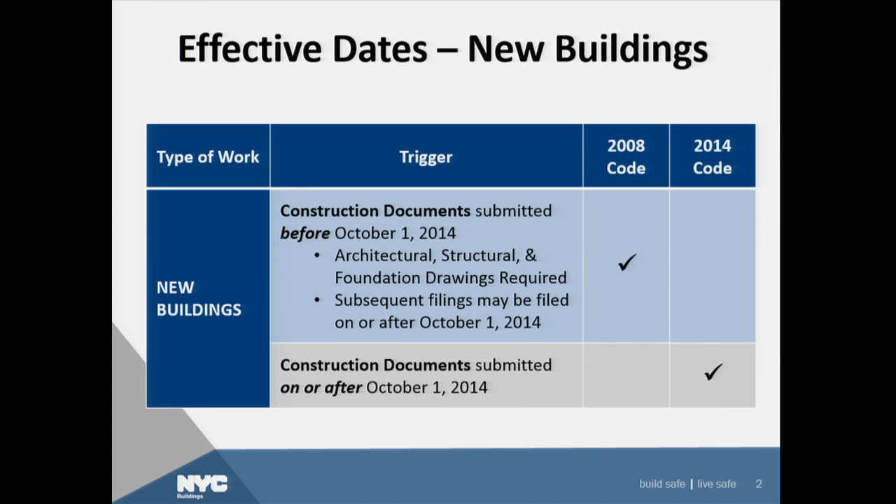So that makes sense, but what happens if I submit my architectural, my structural, and my foundation drawings before October 1, and then I file my fire alarm application 8 months later? That fire alarm application will be reviewed under the 2008 codes as long as your architectural, structural, and foundation drawings were submitted prior to October 1. And that's how it works. It's similar to how we did it last year. There is no period where you can choose either one. It's an on or an off. October 1 is the date. Before October 1, after October 1.

Alterations are a little bit simpler. For alterations, it's just before October 1, on or after October 1. And it's a submission of construction documents to the Department of Buildings, receiving that AP entire status in the computer, and that's what determines which code you will use for your alteration. And when I say which code you will use, that does not mean that after October 1 you must use the 14 codes for all your alteration work. No. It means that you apply the alteration provisions of the 2014 construction codes.

So what does that mean? Well, the 2008 code tells you how to do alterations, and the 2014 code likewise will tell you how to do alterations. It doesn't mean you must always use the 2014 codes for your alteration, but there are certain times you might need to, for fire suppression, accessibility, maybe some other things. But the alteration provisions, as I'm going to go into in my third segment, have some very important differences. So that date of October 1 may be very important for your alteration, because how we treat alterations is changing in some fundamental ways on October 1. And it all depends on when you submit your construction documents to us. And that buildings bulletin will explain it in more detail.

So let's talk about Chapter 33. Chapter 33 is the chapter of the building code that tells you the safeguards during construction operations, how we keep our sites safe, how to underpin properly, how to keep your fences and netting and all that stuff, how to keep debris. It also has some important provisions that tell you who might be qualified to perform certain types of work, or to get on certain types of rigs, or to lift certain things. Those are changing on October 1. So this might be very important for you if you are on a large project where you have to determine those types of things. So again, it's October 1, but there are some nuances, and I'll walk you through some of those nuances.

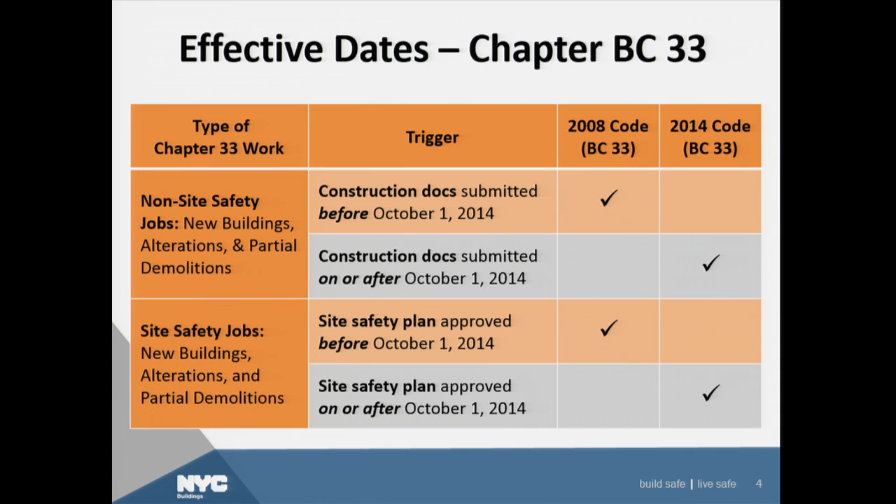But if you're not a site safety job, don't worry about it. This Chapter 33 follows the same code that your underlying work follows.

And of course, full demolitions are a little bit different, not on purpose, but after we looked at the law and read it, our engineers and our staff said, wait a second, full demolitions are treated differently. And I said, are they? We read it, and the lawyers agreed. Full demolitions are a little bit different. Full demolitions depend on when your construction permit was issued.

If your full demolition, I'm demolishing an entire building, was before October 1, that's the permit issuance date, you're under the 08 code, and if you are doing a full demolition and the work permit was issued on or after October 1, then we're in the 2014 code for Chapter 33, okay?

So I've broken down new buildings, alterations, site safety work, and full demolitions, and that's the whole gamut.

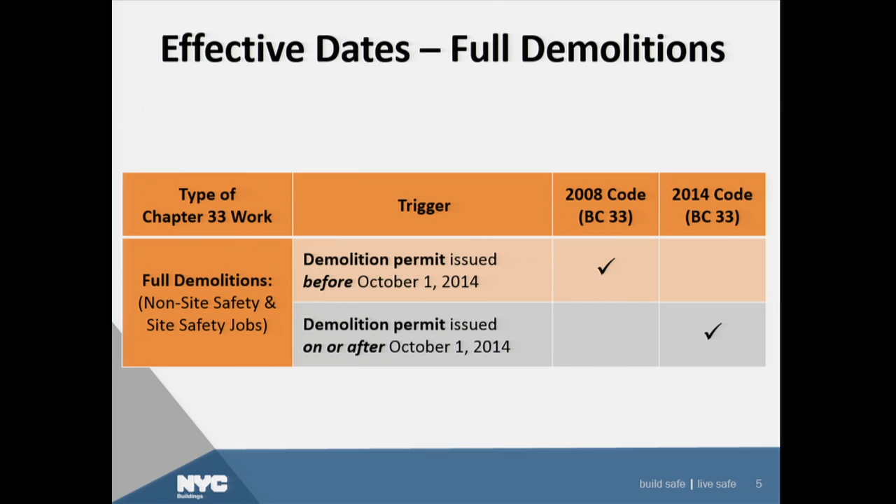And that's very good because I did that fast enough that I think I can slow down a little and go through the rest without rushing, which I think you might appreciate. I tend to talk fast, but let's see if I can do this at a pace that's not too quick.

Okay, so there are some exceptions to these effective date provisions. The exceptions are written into the law. One of them is for some elevator inspections. For whatever reason, the council enacted this law with two particular provisions effective immediately.

And if you are in the elevator world, if the phrase elevator inspection agency means anything to you, then that's important. If the words elevator inspection agency do not mean anything to you, then it is likely that that effective date is not important to you. The other one is a particular provision of BC 403. BC 403 covers high-rise buildings, the largest buildings.

And in fact, this particular provision applies to buildings that are more than 420 feet in height. So we're talking a 30-story office building, maybe a 40-story hotel, really large buildings. And this particular provision will require additional egress. You'll hear about that later on when we talk about Chapter 4. You'll hear it later today.

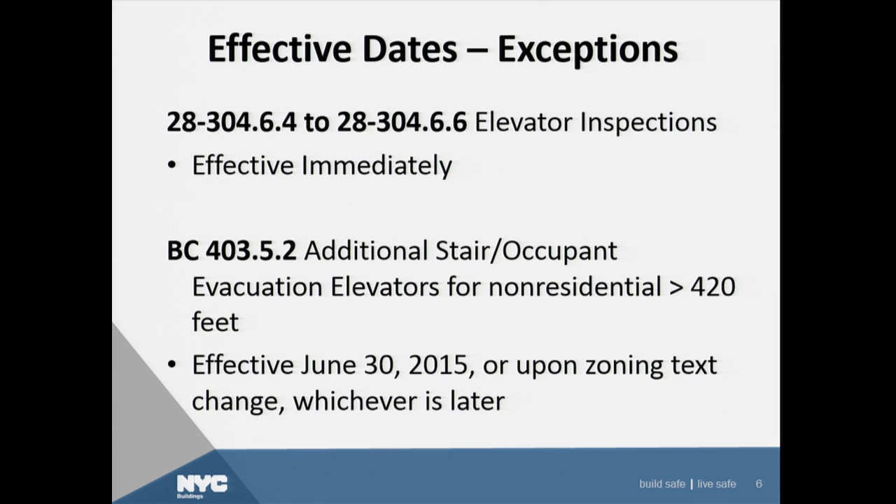But this provision does not take effect on October 1. It will take effect in the future depending on some zoning change, which will be necessary to effectuate that provision. Okay, so that was everything about the effective dates.

Now, I'm going to have some time for questions, I think, later, and we'll have a microphone, but I'm not going to do that now. I'm going to go through my next segment, and then at the end of these segments, we can have questions.

I'm going to talk about the administrative provisions, Title 28. One thing that you will notice right away in 28-101.5, which is the definitions, is that there is a new definition for limited alteration applications, LAAs. These LAAs are jobs that are not filed by architects or engineers. They are filed directly by licensed trades, either by a licensed master plumber, a licensed master fire suppression piping contractor, or an oil burner installer.

Those are the types of work that can be done, and in the past, it was limited to $25,000 a year, and it was limited per building. What this code change does is it breaks it into two categories, Category 1 and Category 2. Category 1 LAAs are the same thing that we knew. There are some new expanded descriptions in there, and you're going to want to read them very carefully because you might not need to file plans and sign-offs by the architect and engineer if the licensed trade can do it themselves. And the limit has been upped to $35,000 per year per building.

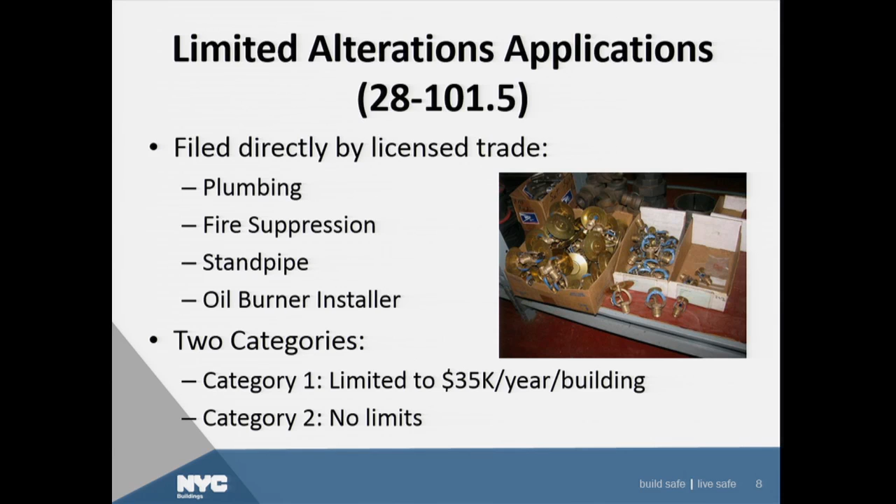Landscape architects. The 2008 code said that the only applicant on a PW1 can be an architect or an engineer, and the landscape architects said to us, I receive a license from New York State, and there are certain types of work that are under my jurisdiction. I ought to be able to file them. And this new 2014 code recognizes that for certain types of applications. Note that it does not include the stormwater and the plumbing and the engineering of the subsurface stuff.

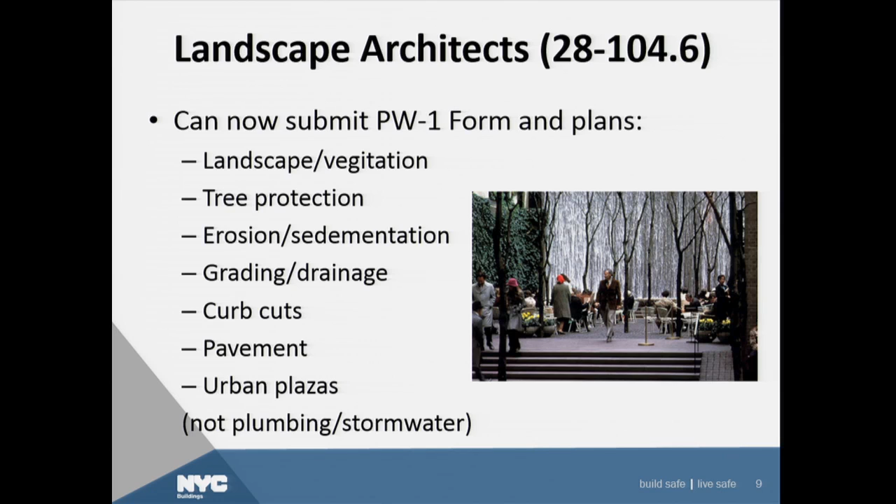That's not included. But this allows the landscape architect, the RLA, new term we have to learn, Registered Landscape Architect, to file certain applications, file the PW1, be a subsequent document, et cetera, all that kind of stuff.

Okay, I think most people were doing this already, but there's a change in 104.7.7 that the progress inspections also have to be listed on the cover sheet. We've always said that the special inspections have to be listed. It wasn't explicit about the progress. Now it's explicit, so we'll do that, and our examiners will look for that, and that's a good thing.

This is a funny thing.

Okay, so you'll hear later about a retroactive requirement for certain hospitals, nursing homes, and assisted living, like the enriched housing, those kinds of things, to install something in the future by the year 2022, 2023, something like that. They have to install hookups for external generators.

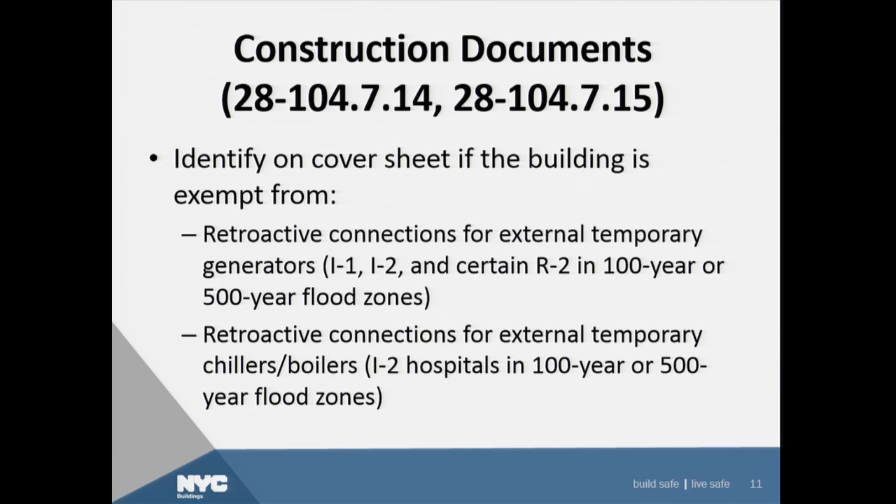Is that important to you? If you file I1s, I2s, or R2s, which are assisted living, or not, I shouldn't say assisted living, those are I1s, enriched housing, adult homes, those kinds of things, then this is important for your construction documents.

Another provision that's administrative is geotechnical investigations. The question was always, do I need a permit to dig a hole so I can get my permit? The question you may have got wasn't clear in the code. We would look it up. And now it's crystal clear. It tells you the limitations.

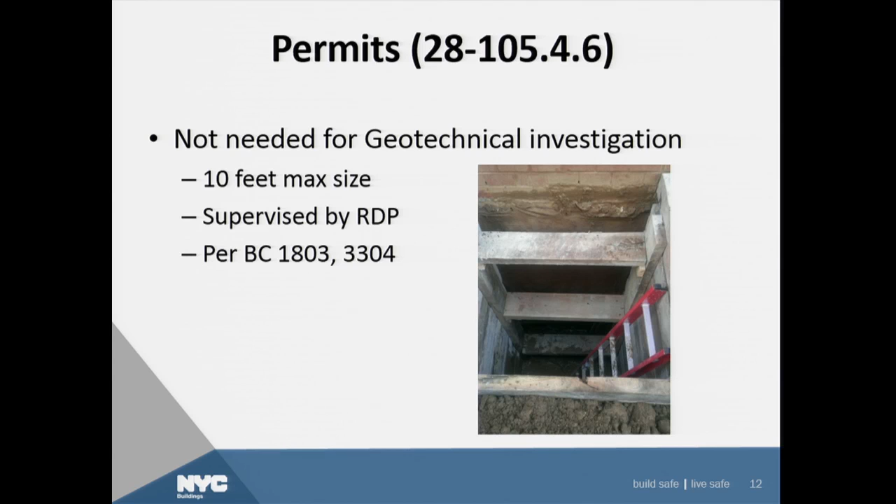When you look at 105.4.6 and it refers you to Chapter 18 and Chapter 33, it will delineate specifically what kind of holes you can dig, test pits, borings, those kinds of things without obtaining a permit if you follow certain requirements and within certain limitations, that there would be supervised by an RDP, Registered Design Professional. It tells you what to do, and that will save a lot of paperwork and gobbledygook, and it's a good thing. Okay?

Temporary uses and structures. Now we're up to 28.111. Okay, 28.111 was rewritten. It was intended to be clearer and make a distinction between a temporary work permit for a structure versus a temporary use letter for an event. If I want to have an event in a place, and I'm not talking about places of assembly, I'm talking about some other kind of event, and the C of O isn't for that, but I want a temporary occupation for a certain thing, that's a temporary use letter. And now it's crystal clear what the standards are, what the fees are, explains that.

A temporary work permit for a platform, a tent, those kinds of things is separately specified, and it's a little bit clearer. It also changes the maximum number of days to up to 90 days before you have to renew. I will tell you that the fees have been adjusted accordingly, so getting a 90-day permit is not going to save you any money. And I also will say that it's not allowed to get it for longer than you're going to need it, and the borough may limit the number of days depending on the nature of the event. But you can get up to 90 days, and it makes it a lot easier for those renewals for things that might be known to be there for half a year.

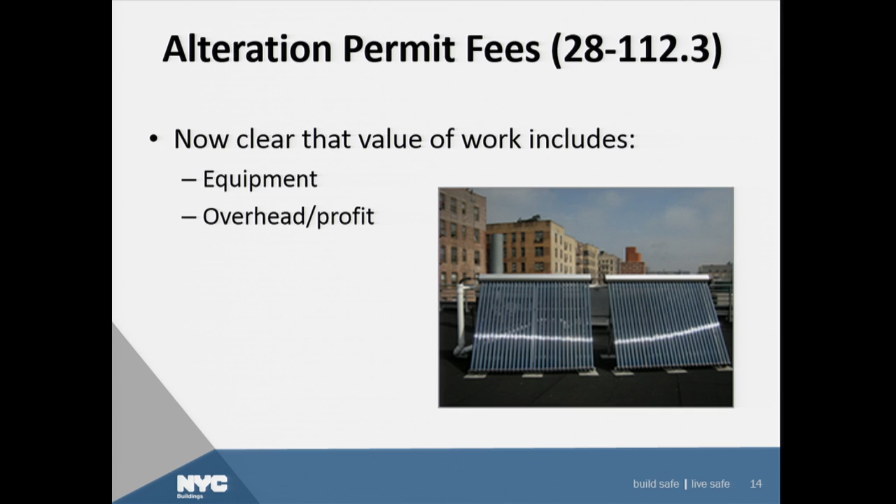Okay. Permit fees. It was clear to us that the equipment that was being installed, the machinery, the boilers, the solar panels, that's part of the alteration cost that goes into your permit calculations. Also, overhead and profit. It's the reasonable cost that you pay for these kinds of work that's being done. That's all included in the value that you calculate to determine what the permit fees are, and that's made a little bit clearer in the amendments to 28.112.3, and you'll see that when you go through the book.

Okay. Now, there also was not anything clearly in the text that when something changes to your building, it's been renumbered, the address, you've changed the block and lots, what happens to the old C of O that sits on the books that's no longer there? This gives a 1-year window within which time the owner is obligated to come into us and obtain an amended C of O. And this provision has some streamlined processes built into the code that tells you what kind of inspection is required if this is the reason why you need to do your certificate of occupancy.

But of course, if there are other reasons why you need the certificate of occupancy, then the streamlined provisions in the section would not apply. I think we know that.

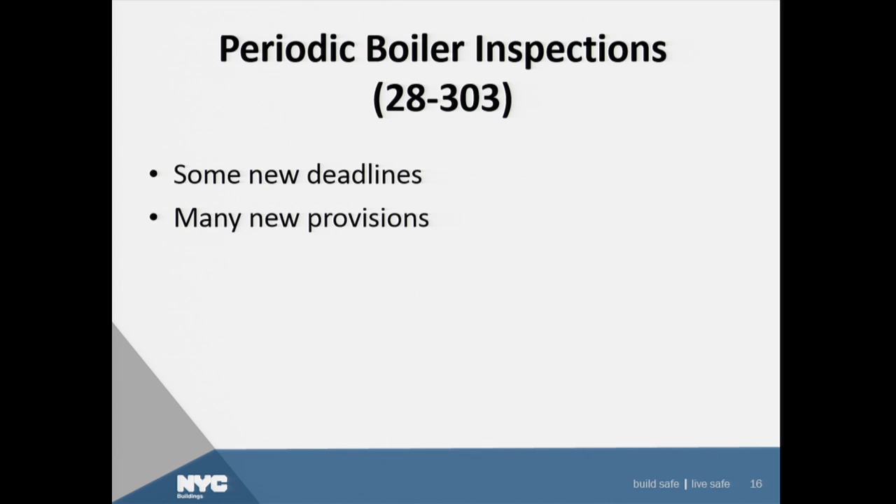Okay, next slide. We're on slide 16. So, periodic boiler inspections. To the people in the boiler world, and most of you are not, but there are new deadlines and some new provisions with respect to the inspections. And if this is your world, I recommend you look at 28.303. But given the time and the people in this room, I'm going to breeze past this slide to 17. Now, same for elevators. If you're in the elevator world, there are new deadlines and new provisions.

And the one that I bring to the attention of people in this room is 304.10, 28-304.10. It requires certain occupant notification for planned outages. If you're going to do an elevator repair and it's going to put an elevator out of service for a period of time, read that provision. It tells you certain things you must do in terms of notifying the occupants.

And that's minimal. You can always exceed that. It always makes for happier tenants and happier occupants if you give them as much information as possible if you're going to put an elevator out of service.

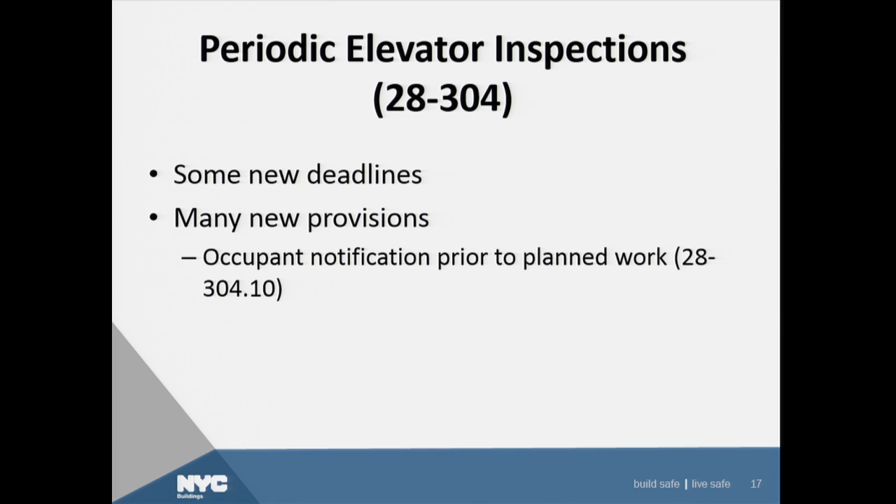Okay. Can everyone hear me? Okay. I mean, I could get closer. Is that better? No. This is good? That's good? Okay.

Okay, so retroactive requirements. In the 68 code, 1968, it was not so clear what was retroactive, what wasn't. You had to search through the book. You couldn't really find it very easily. We adopted the 2008 code, and there was no repository for retroactive requirements. Yet the New York City Council passed many retroactive laws since the 2008 code. So we wanted to have that in one place so that you can look.

And you will look on this list, and you will see all of the retroactive requirements that were enacted after 2008 in one place. Now, the 1968 code retroactive requirements still apply. If you have an office building more than 100 feet in height, you still need to understand what Local Law 5 of 73, 16 of 84, 26 of 04, all those magic words, those laws we know, they're still on the books, and they still will require those retroactive sprinklers or fire alarms or exit signs that we had to put in back in the 70s, 80s, and 2000s. They're still on the books. But those retroactive requirements that were enacted after 2008, they're all in one place.

Some examples, and I'm not going to list them all. You can look at 28-315 and see them, because they're all old news. The council passed a law that you have to retroactively paint the sprinkler and standpipe risers and certain cross connections, things like that, in the basements and throughout the building. You had to paint them red by the year 2010. So that's now listed in 28-315. It might be green also. There's some red, there's some green.

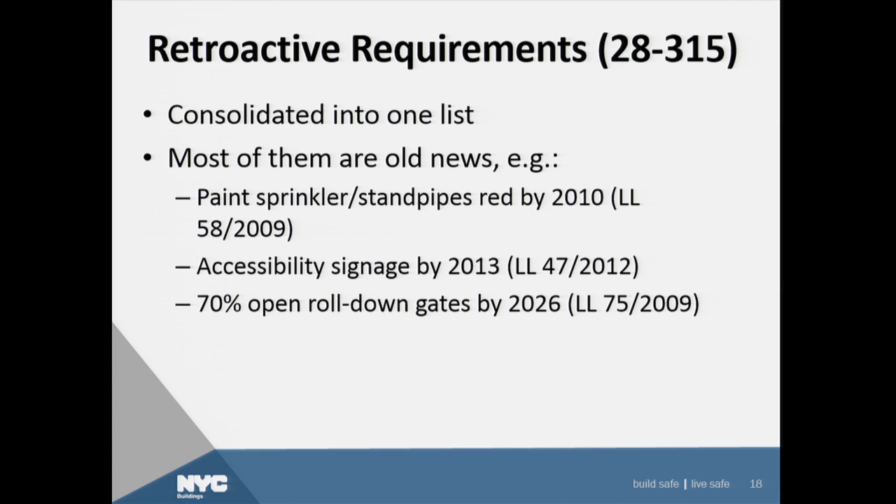This is another one by the year 2026. Roll-down gates on certain occupancies must be 70% open. No more solid roll-down gates. It already is a requirement for renovations. If you're replacing one, it must meet this from day one. But if I have an existing one, I have until 2026. And unless you dug through all these laws, you wouldn't see it. Therefore, it is now in 28-315 in one nice place.

There are some new ones that are going to become published for the first time October 1 with this new local law, with our 2014 codes. There are some safety upgrades for elevators, and if you are an elevator professional and you deal with that, you will want to look at 28-315, and it will refer you to Appendix K, which will have certain upgrades for certain types of old elevators.

There is a requirement by the year 2021 for an emergency source of water for basically, I'll say, apartment buildings that rely on pumps. If you have an apartment building that relies on a pump to get water to the tenants, the council was very concerned, if the electricity goes out and your pump doesn't work, what are you going to do? Is there a fixture somewhere on the ground floor or below the level that you need the pumps to get water so they can get their buckets? That's what that's about. And you must do that in all these buildings by 2021. That's new, and it's listed in 28-315.

It's a retroactive requirement. Okay, the I-1, I-2, and R-2 buildings, I will say certain R-2. Those are the R-2s that are adult homes and those kinds of buildings.

They will have to have a connection for an external generator unless their generator is elevated above the floodplain. And if I am a hospital, I will have to have a temporary connection by the year 2033 for a boiler and chiller to maintain air conditioning and heat in my hospital, unless all of those emergency generator facilities are located above the floodplain. So those are things that are retroactive and they're new.

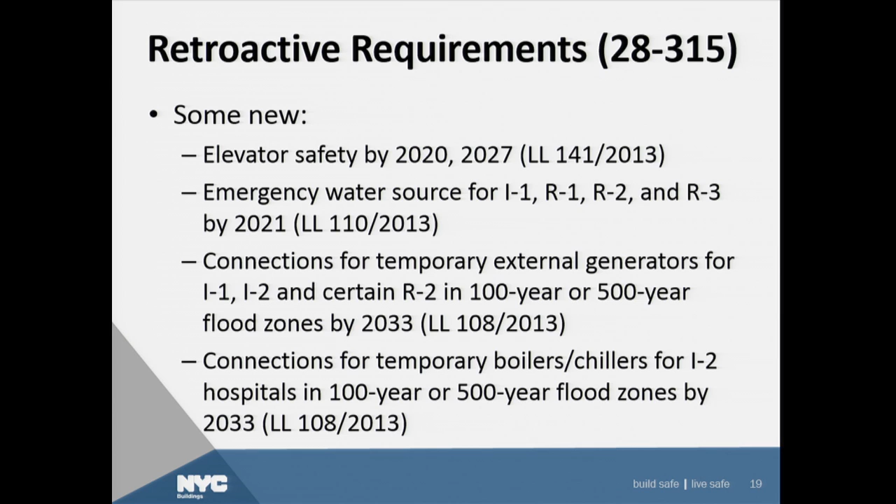They may or may not affect the projects that your clients have, but you can look at 28-315 and see them all in one place. And when the council passes another retroactive law, and they will, this is where you'll find it. Okay, so let's talk about sewage and stormwater.

And if anyone is still using the term SD1 or SD2, please don't. Those forms don't exist. They have not existed for a couple of years. They're House Connection Proposal Applications and Site Connection Proposal Applications, HCP and SCP applications, right? This portion of the law will clarify and actually changes how we do business a little bit.

You will see in this table BC and PC. The sewage provisions of BC 107.11.1 are identical, word for word, to the plumbing provision of 106.6.1. And the stormwater provision of BC 107.11.2 is identical, word for word, to PC 106.6.2. So the only thing to understand here is that it duplicates, and if you look in the building code or the plumbing code, it's going to say the same thing, but there is a difference for the sewage and the stormwater. I'm going to walk you through how that works.

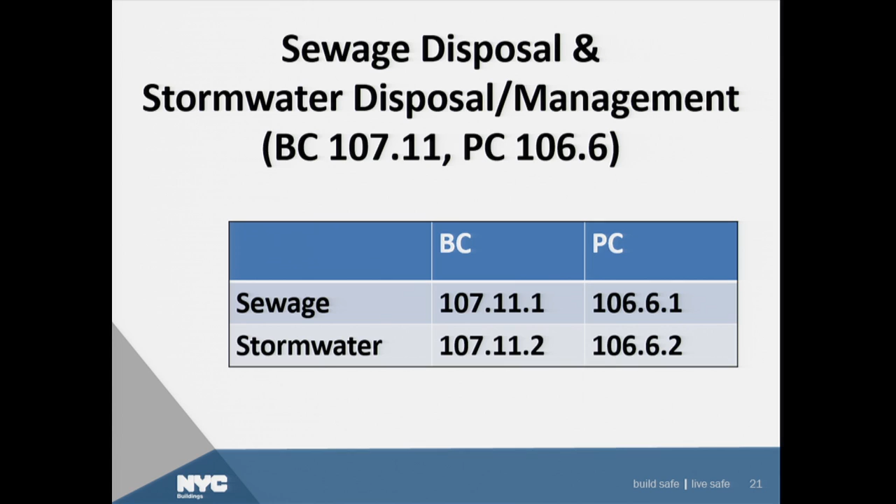Okay, so let's talk about sewage first, okay? Not the stormwater, the sewage, toilets, sinks, those kinds of things. The way the code is working now is it establishes when DOB will not approve the application unless there is something from DEP. It's going to be a piece of paper. We want that piece of paper. That piece of paper will be required in 3 categories with respect to sewage.

Every new building will require that piece of paper from DEP. The only exception is if there is no plumbing in the building that produces sewage. I could see a 1-story garage that only has stormwater. We were not going to require anything about the sewage for that. But if it has a sink in there or a toilet, then obviously; most new buildings produce sewage, and they will need this sewer certification.

Then it says an alteration requiring an increased size of connection. So let's say I have a 6-story building, I add 2 stories to it. I've added so many fixtures that my fixture count says I need a bigger connection and I have to make a bigger connection. That's when my examiners will ask for that piece of paper. If your alteration does not increase the number of fixtures such that when the MEP engineer does his calculations the fixture count doesn't require an increased size of connection, we're not going to ask for that piece of paper. We're talking about sewage, not stormwater, sewage.

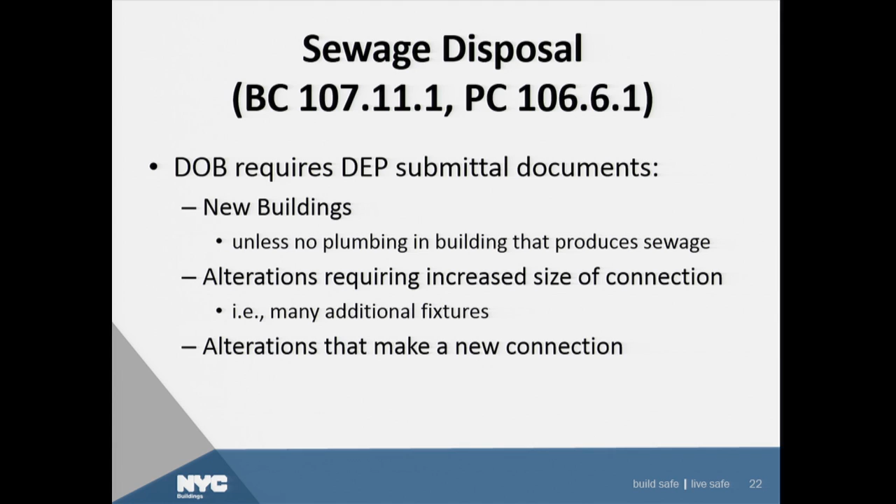And then let's say you are moving the connection to a new location, whether or not you're increasing anything, we'll also ask for that piece of paper. And that's sewage. And under sewage, we have those submittal documents, the HCP, SCP, not the SD1 or SD2. We're going to ask for something from DEP certifying whether it's available or feasible. Well, the people who know, this is more complicated. It's certifying that there is a public sewer that is available or a feasible connection thereto. That's the words there, but you can get to it.

Or DEP is going to certify that it's not available and not feasible to connect, or one or the other, I guess. If it's not available or it's not feasible, then DEP will give that piece of paper. If it's not feasible, I can't permit the building. It's not going to happen unless you can prove that there is a septic system that can be installed on that site and meet all of the requirements that we impose. So there are some places, mostly in Staten Island and Queens, where septic systems are still permitted for sewage. And if you can prove that, that's fine.

But if DEP says you can't connect or it's not feasible or available, we're not going to approve it unless you can also show compliance with septic. That's how it works. We are going to require that piece of paper in every case. And the next slide is the same, but with a big red there. DOB is no longer in the business of measuring whether you're 100 feet, 150 feet, 500 feet, 300 feet, all the numbers. Not for us.

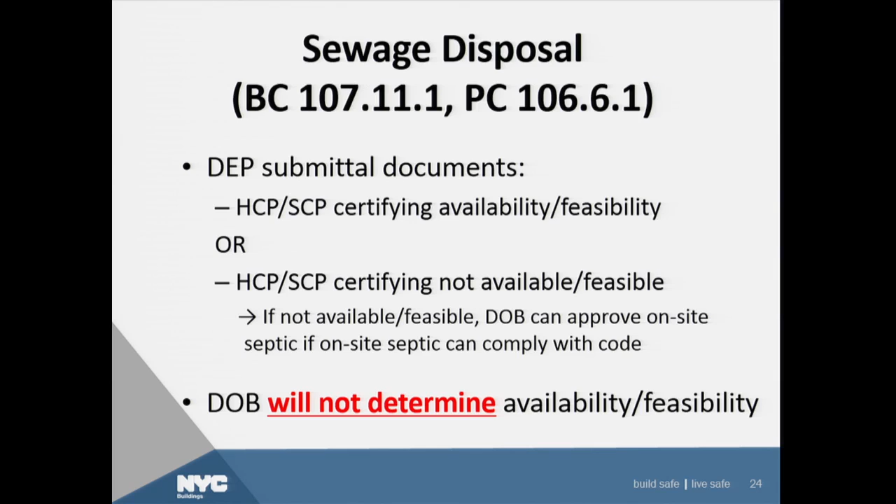Let's talk about stormwater. You're going to find out that stormwater is very much the same. We are going to require that piece of paper in 3 categories, slightly different. Any new building, even if it's a garage, it doesn't matter. A new building, you're going to give me a document from DEP. If I'm altering a building, read this very carefully. Horizontal enlargements ignoring existing paving

or impervious surfaces. I cannot tell you how many times someone has come into my office and shown me this plan. I'm doing an enlargement in the backyard, but I'm not increasing the existing impervious surfaces. The whole backyard was already cement from years ago. I go on Google Earth, I look, it's a beautiful green yard. Any enlargement is the trigger for the DEP paperwork. Horizontally, not vertically, because vertically the existing facilities ought to have been already approved or grandfathered, whatever they are. But if I horizontally enlarge a building, paperwork.

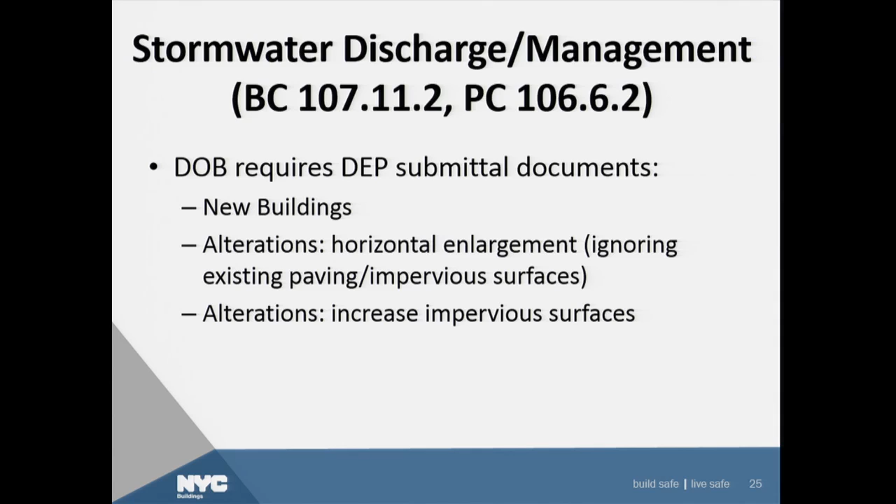Okay. Alterations that increase the impervious surface. Now let's say I want to add a paved area. Okay, that's one of my 3 categories. Those are the 3 things that my examiners will now say, give me something from DEP, and we go through the process. And of course, what would a code be without exceptions? We have exceptions.

If I have a 1 or 2 family house, the code basically grandfathers and starts again from 2008, okay? That old stuff you had, whatever you had is there, exists. We couldn't go crazy trying to relitigate what happened in the past. But post-2008, if I have a 1 or 2 family house and you're doing less than 200 square feet, it will be absorbed into the existing systems. Unless you want to do something extra, we're not requiring it.

It may be that the existing facilities tend to back up or something like that. If you know of something, good engineering practice is going to require that you do something. But my department will not insist on it if that horizontal enlargement or increase in impervious surfaces is less than or equal to 200 square feet, and that's looking cumulatively post-2008. So you can't do 195 square feet one year, 195 feet the second year.

It adds cumulatively post-2008. Now, for all buildings, whether it's a 1-family, 2-family, or whatever, if it's equal to or less than 1,000 square feet post-2008 cumulatively, if you provide on-site retention. Now, I always got detention and retention confused, but retention holds it and keeps it on site. You retain it. Detention, I think of like high school. They detain you, but they don't keep you there forever. They'll let you go eventually. So that's how I remember.

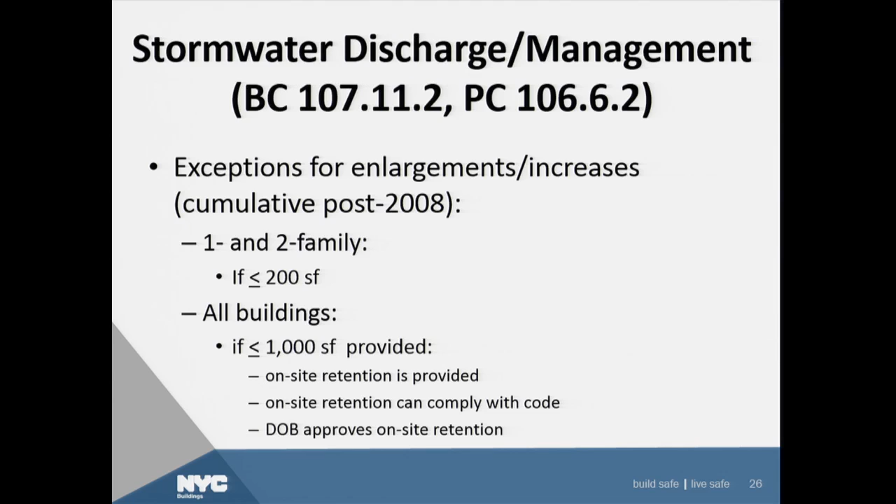But let's say you are required to go to DEP, you are required to get that paperwork. How does it work? You either get that HCP/SCP with respect to stormwater, certifying that there is a public combined or storm sewer that is available and that connection thereto is feasible. And DEP may condition their approval on detention or retention. They can do that. And those in the business who do this stuff regularly know that they often do that, and then they will review whatever they do.

Or you will get a piece of paper from DEP, an HCP or SCP, certifying that there is no public storm or combined sewer that is available, or that if there is, connection thereto is not feasible. If that is the case, then I cannot approve the application unless there is something I can approve that has on-site, not detention, retention. There we go. So that's the way it works.

We think it's a little easier. The only thing I will highlight again is that DOB will not determine the availability or feasibility. That means that DEP is going to be the one that takes out that measuring tape and says whether 100, 300, 500, whatever those numbers are, that's going to be their job. They will determine it. And if it is a professional certification of those requirements, then we will utilize what DEP says. You're going to self-certify on their form.

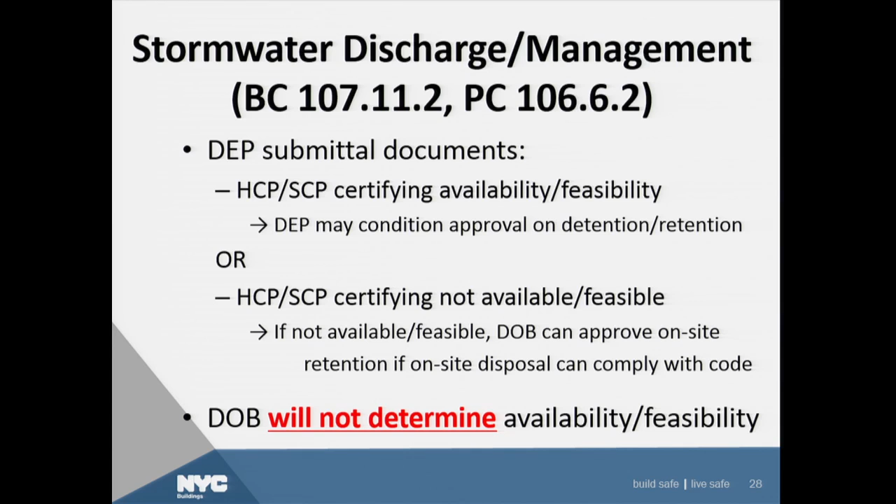They'll stamp it as being received, and that's what comes back to DOB. It's no longer a DOB form. It's no longer a DOB review. It's a DEP process. Okay, so let's move on. The operational changes that I put out there as kind of the big picture things to look at and think about is that there will be changes in BIS, our building information system. That's our computer system that manages all of our processes.

Forms may be different. The PW1 will have different questions all of a sudden. They'll be asking you things you didn't have to check before in response to these changes in the law. E-filing may be a little bit different, and required items may be different. The areas with the most significant changes, I'd say, are LAAs, those limited alteration applications. We talked about that. They're going to be very different. The PW1 form itself, and special inspections and the TR1.

There are now some new special inspections. We expect that the registration process will be up by then. There are not that many of them, and they're not that common special inspections, but there are some new ones, and there's been some renaming. You'll see that in Chapter 17, and hear about that later. Okay, so now I'm up to alterations.

Helen, how am I doing for time? I'm good? Okay. Because I'm going to need to ask you how much time I have for questions when I get there. Okay?

So let's talk about alterations to existing buildings. This is the third component that I wanted to talk about.

Okay. And it looks like I'll have lots of time for questions, right? So far, okay. Well, let's see how I go with this.

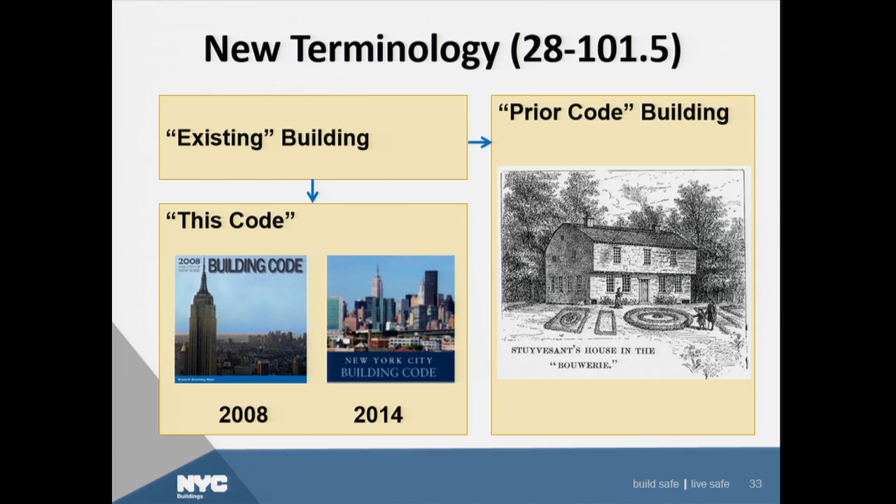Okay, so first thing I want to bring your attention to is this new provision 28-101.4.5. The reason for this provision was that people were starting to come to us with applications which we would perhaps have issues with, where they would take a one-story building, they would want to add 20 stories and say, no, I'm going to use the 1968 code. That's kind of absurd if you think about it. We had to come up with a solution for that. Okay? And what this provision does is it imposes the 2014 codes for certain types of big alterations. Okay? Let's see what that means.

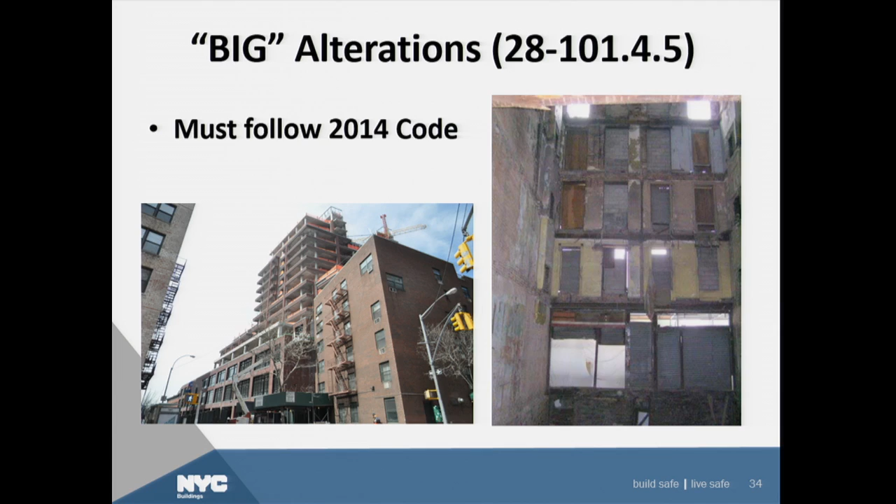Everyone, or people in the know here, know TPPN 1 of 02, which will allow you to use the older codes and file it as an alteration rather than a new building if you meet certain criteria. And those criteria have been occasion for many CCD1 forms, I should say. I'll leave it at that. That's not going to be there anymore. It's going to be gone.

When I hit that button, hit the red X, I think it was in Fort Totten at the Queens AIA and the Queens New York State Society of Professional Engineers. There was an audible gasp in the audience when I put that red X through it. Okay. So what are we going to do?

Well, the code says that if you increase the existing floor surface area of a prior code building by more than 110%, you're basically more than doubling it. If I more than double a building, then the building is going to comply with the new code, and you'll file it as an NB, and the fees will be calculated like an alteration. I more than double it.

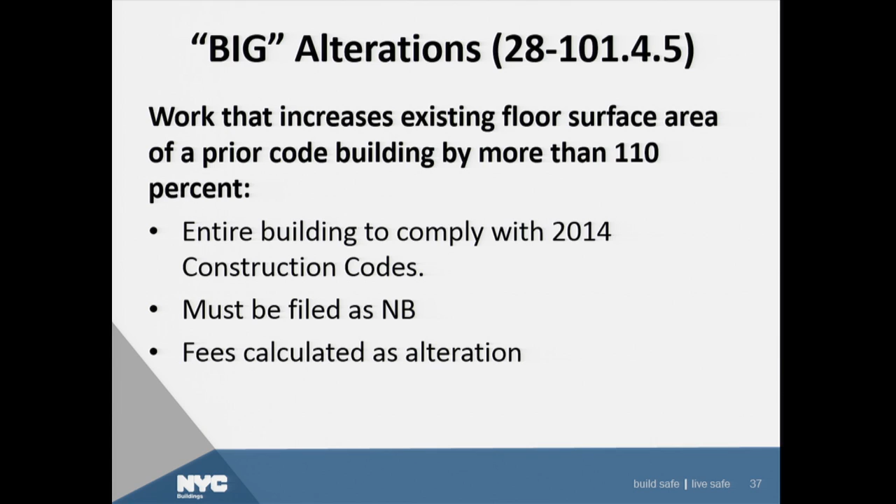Now, that doesn't mean that you can't, you might have a practical difficulty and you'll come in for a variation because the columns or the masonry, whatever, is in the wrong place, or it's an old tenement, whatever it is, okay? We have some authority to vary the provisions of the 2014 codes, but the bottom line is if you're more than doubling a building, and we even gave the extra 10%, then you're going to comply with the 2014 code.

So it has this definition, and I'm not a fan of reading definitions to an audience of 800 people who are going to be here for 6 hours, so I won't. But basically, it includes all the horizontal surfaces, including roofs, and the roofs of bulkheads and superstructures, and all this stuff. It was intended to be a little generous so people don't get stuck on the wrong side of that line in the sand when they're really just doing a minor change. And you can read the definition, you'll understand it, and yes, we've heard questions, what about sloped roofs, what about attics? We will be issuing guidance on this, so please don't ask those questions. We will get there. We've heard those questions already.

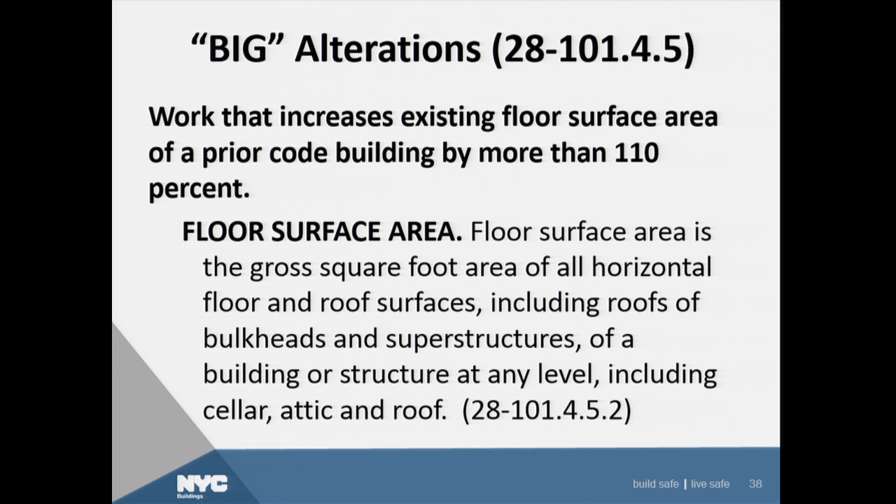Now, what's important to understand about this is what's excepted from that definition of the floor area that you then add. Now I will say, before I get to the exceptions, that it includes the cellars or basements. So what's excepted? Square footage removed during the course of the work, and square footage that was previously installed but signed off less than 12 months before the submission of the current application.

Well, the first one really means if I have a 5-story building and I take it down to a 1-story building and then I want to add 5 stories back, I start where I got down to. The least common denominator is a 1-story building. That's where I'm going to start measuring from. I'm not going to measure from what I had. I'm going to measure from what I ended up with before I start putting back.

And the other one says that you can't add it, sign it off, add it, sign it off, add it, sign it off, and get out of it. Okay, you see where it's going. Unless it's signed off for 12 months. Now, if you want to add a story, sign it off, wait 12 months, add a story, wait 12 months, sign off. Good luck to you. If you have a client that patient and it's that important to you, you deserve it. You really do.

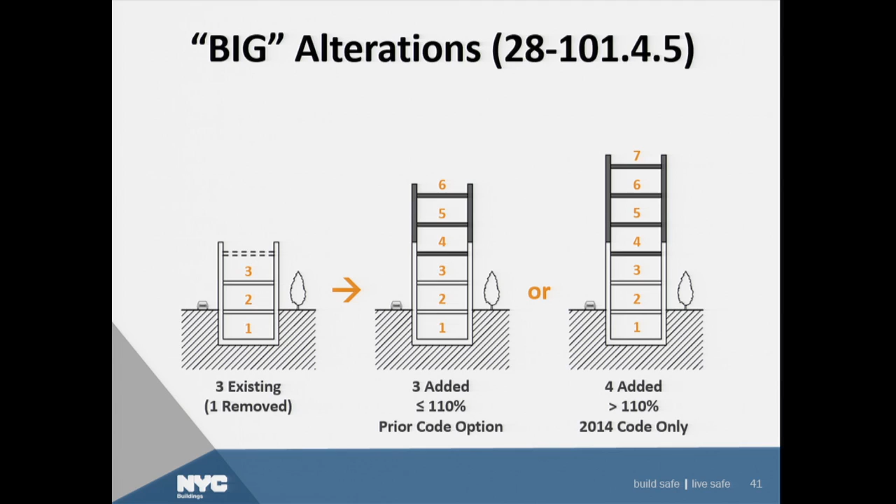I have that same 2-story building, but I've removed the roof, and I start putting things back. I no longer count that roof towards my 110% because it's been removed. I add as many as I can. I end up from a 2-story building to a 1, 2, 3, 4-story building. I can do that, and I still get to file it as an alteration. I don't have to file it as an NB, and that's how it works. Add that extra story, now I'm more than 110%, and that's a 5-story building. So my 2-story to a 5, now I've hit the number, and you'll file it as an NB.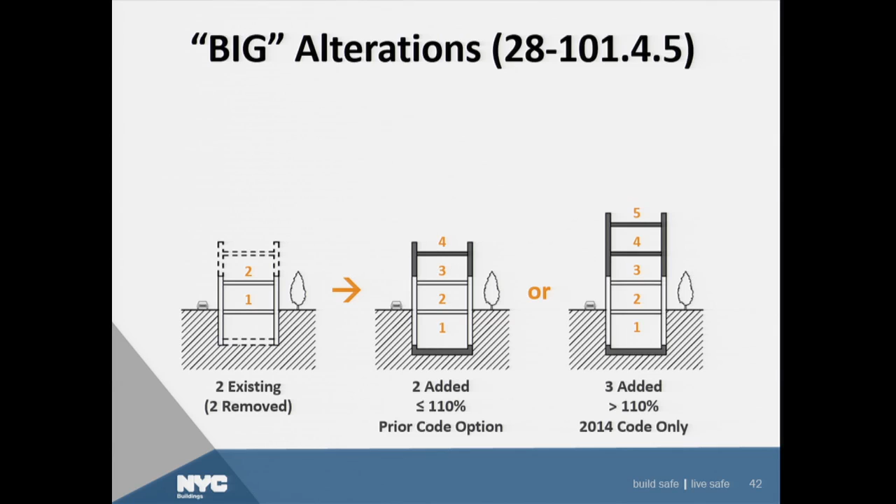I'll follow the 2014 code for the new building, and if I need a variance, we'll deal with it, but our examiners are going to look at it and say, line in the sand, you've crossed it, and that's where we are. That will prevent people from taking a 6-story building, tearing it down to a 1-story building, using an old TPPN, and then reconstructing a 10-story building as an alteration under the 1968 building code.

Okay. Now, I just took a picture of this, and I hope the architect's not in the audience here. It's very nice. It does this thing. It adds up. I can't tell you whether this would or would not have been subject to these provisions because I don't know what they did inside. It looks as though the thing on top is smaller than what's inside, so it's probably less than 110%, but they may have replaced the joist inside. I don't know.

One thing to note, 2 things on slide 44. The change of the scope of work from under to over the 110% must be refiled as an NB before continuing any more removals. I've heard over and over again, it was the termites that did it. I'm sorry, I rebuilt the whole building. I didn't realize. The contractor found termites, they tore down the whole thing and started rebuilding. No, once the termites are found and you take away more than you thought you had to take away, you stop, you refile, you move it forward.

The other thing that's very important, exceedingly important, is the zoning. The fact that you might be required by my department to file it as an NB does not take away any rights that you may have had to maintain non-complying bulk or use. So you may take away a lot and put back more than you had, but zoning, as long as you keep 75% of what you had in some cases or whatever it is, may allow you to keep that non-complying bulk. May very well. So there's separate inquiries, and you have to think about them that way. Okay? And that's a good thing, because that means you might not have to take away your non-compliances.

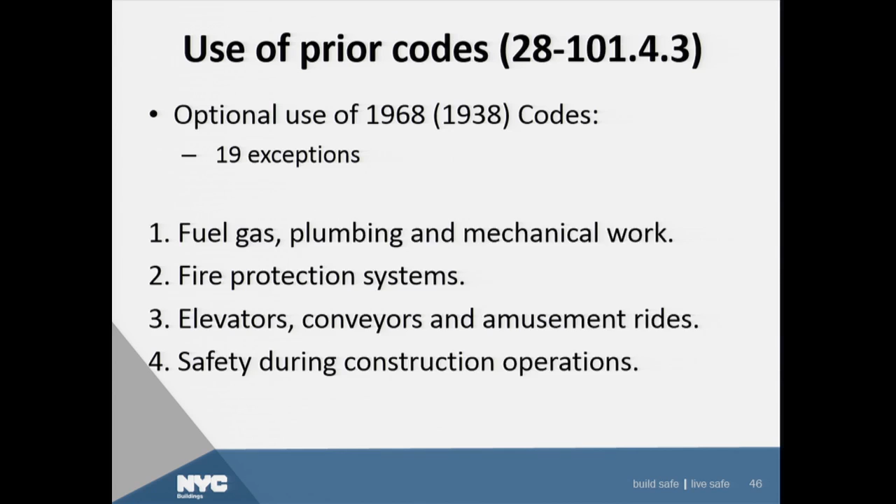Accessibility, we've always had exception number 5 in the 2008 code. We've maintained that, but we have clarified and reorganized it so that you don't need to look at Local Law 58 anymore. And you'll hear about that as I go through the accessibility provisions.

Encroachments into the public right-of-way, same as the 2008 code. You will look at chapter 32 of the building code for your projections, your balconies, your stoops, your handicap ramps, all that stuff. Chapter 32 still applies. And you'll hear from Mr. Kaminer later today that there are some new exceptions that will make it easier in landmark districts to deal with encroachments.

Administration enforcement, we're still going to use the 2014 codes for permit issuance, violations, all that kind of stuff, even if you're using the 68 code. Special inspections, of course, we're going to use the 2014 codes. We're not going to go back to the controlled inspections.

Sounds funny to say that now, controlled inspections. It almost hurts my mouth. I've gotten so used to saying special inspections. Okay.

Materials, security grills. Security grills are, that's the provision I talked about, the roll-down gates. If you're putting a security grill on a building, it's got to be 70% see-through in certain cases, and that was added by the council. We've retained it. Exception 10 was not in the original 2008 code, but it was added by the city council between 2008 and 2014, so you will see it again in the 2014 code when the ICC does the publication.

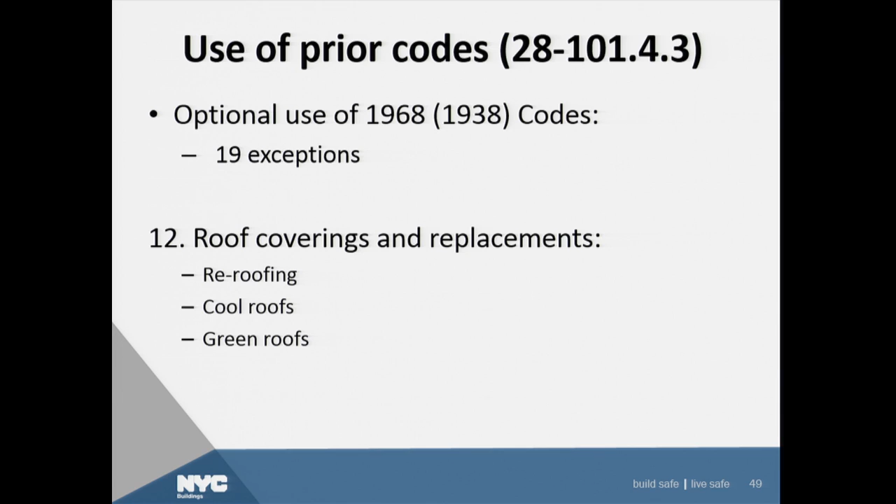And green roofs. This is a provision that allows you to jump ahead and use the 2014 code for your green roof, even if you're using the 68 code or the 38 code. It's just an allowance. It's not a requirement, really. And you'll see that when you read 28-101.4.3, exception number 12.

Okay. I'm not through the exceptions. How am I doing? 10 minutes. Okay. So before the break, right? So maybe questions after break, probably. Okay. I'm on slide 50 now.

Handrails. This is actually not a very onerous provision. It says if I'm going to reconstruct an entire stair enclosure in a building that I'm using the 68 code or the 38 code, the handrails ought to comply with the 2014 construction codes. Now, for your own liability, you'd want that. The handrails have to have extensions, a certain size, graspable, all that stuff that keeps people from falling.

It's actually very important. The ergonomics of grabbing handrails, that's the reason why a lot of people fall, and using the modern standards is good, and this does not impose it on you, although we urge you to use it all the time anyway, but it does not impose it upon you unless you are reconstructing an entire stair enclosure in a 68 or 38 code building.

Guards. This is very important. Guards would apply to your balconies, drop-offs before a cliff of some kind. This is new. And it says that if I have a 38 code or a 68 code building and I'm doing an alteration application, and part of that alteration, and even a repair, is dealing with those guards on my balconies, I am going to use the 2014 code for those guards.

And that's important for the structural stability and how they're connected and all those kinds of things. And that addresses some issues we've had in New York City in the past, and it's important to understand that provision. Areas of special flood hazard, we've always had this. You have to look at Appendix G to understand what to do for an alteration, and we have some requirements for that.

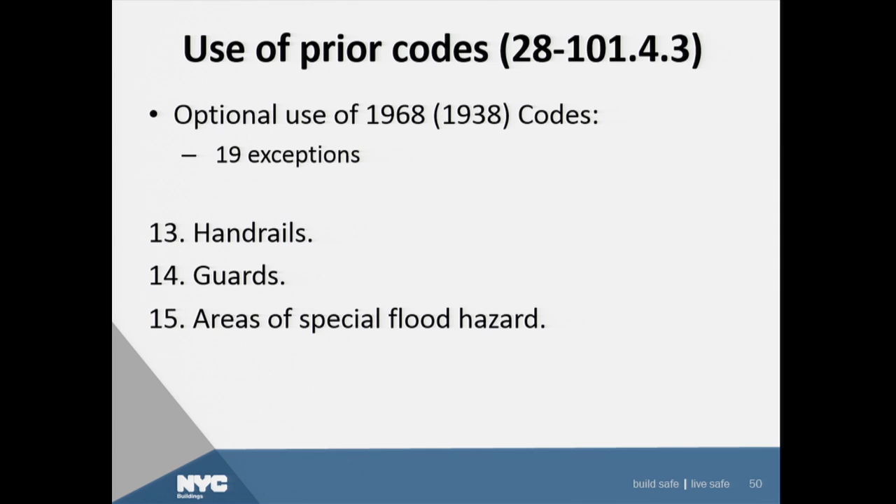Structural, don't get scared. The structural provisions are not that great, but they are there. It actually has many allowances, and when I get through those provisions, it'll explain how to use modern calculations and modern structural things that these engineers do to your old buildings in a way that helps. There are only 2 new changes, maybe 3, regarding maybe wind and stuff like that. We'll get there when we talk about structural.

Emergency and standby power. You're going to use BC Chapter 27. You ought not to be looking at the 68 building code anymore for that. Parking garages and open parking lots. There's something about electric vehicle charging station ampacity for your electrical service. If you're doing something and changing the electrical service of your garage or parking lot, you might need to do this anyway, now, even if you're using 68 code.

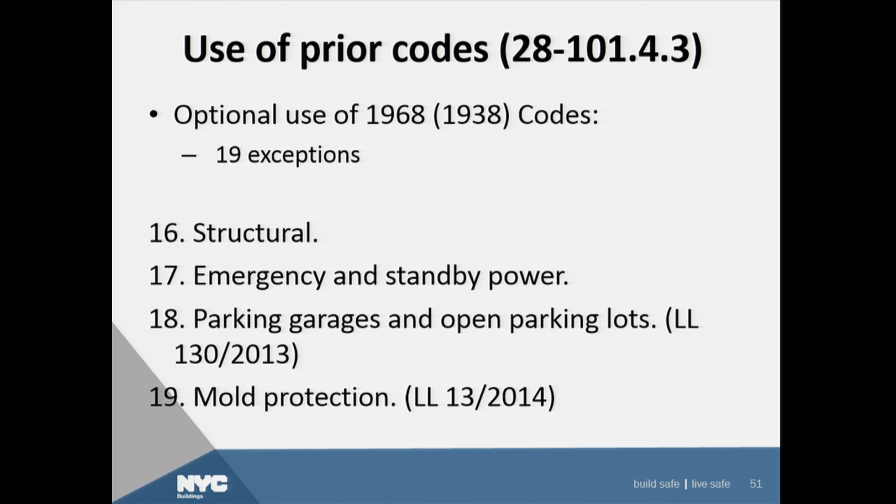And mold protection. Basically, if you're putting drywall as a renovation in your 68 code or your 38 code building, you're going to use the 2014 code, which will require mold-resistant drywall in subgrade spaces and some other areas. I mean, for your new building, you should know that too. If you're doing subgrade spaces now, it's going to be mold-resistant drywall. If someone in this room is the one who specifies drywall, make a note of that. But that's important even for alterations.

Okay, so now what I'm going to start to do, and then we'll take. Thank you. I'm going to start this for about 10 minutes, and then I think we take a 15 or 20 minute break. They'll tell me.

These particular exceptions, exception 1, 2, 3, 5, and 16, I need to go in a little more detail and explain them because, and you'll read at the top, it says, special provisions for prior code buildings. Now, we know what a prior code building is, right? Think who was that, Mayor Stuyvesant, right? Special provisions for prior code buildings. These exceptions will send you to other places in order to apply those special provisions.

Exception 1 will send you to PC, plumbing code, FGC, fuel gas code, or mechanical code, 102.4. Exception number 2 will send you to 901, and exception 3 will send you to 3001. Accessibility will send you to 1101, and structural 1601. And what's nice about 901, 3001, 1101, 1601 is you can always find it. It's always the first section of 9, the first section of 30, the first section of 11. It's always 1. And then it's the last subsection of the first section of every chapter. The plumbing, fuel gas, mechanical follows the ICC format, and we did that.

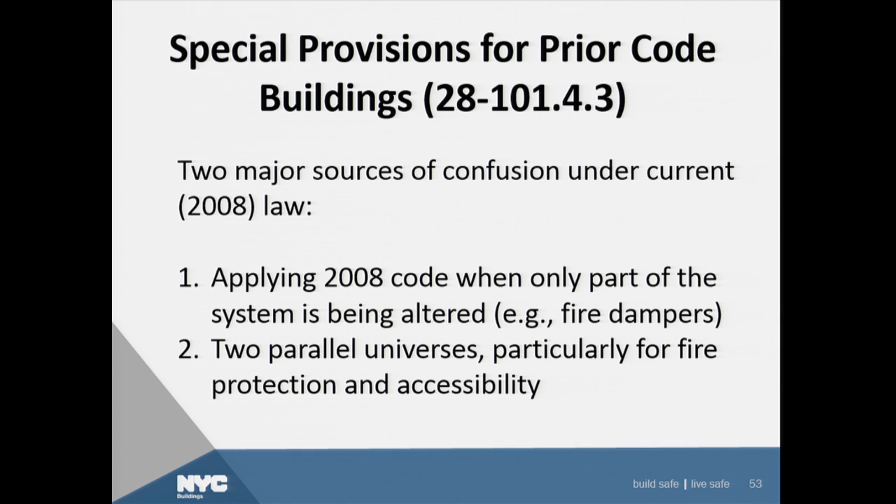Okay, these are the examples. So, under the 2008 code, the current law on the books, I get to choose the 68 code. Beautiful, I'm choosing 68 code. But I have an exception number 2, fire protection. And what it tells me is that any fire protection work that I do, or any change of occupancy that I perform, will require compliance with the 2008 code for fire protection.

But let's say I don't hit those triggers. I'm not planning on doing fire protection work, or I'm not changing my occupancy. Then I get to go back to the 68 code, free pass, right? No, not a free pass. If the cost is more than 60% of the building, I'm still going to have to update it to the sprinkler provisions of the 68 code. Not the 08 code, no, the 68 code, that's what it says.

What if I'm between 30 and 60, then I sprinkler the space. What if I exceed 50%? If I'm a multiple dwelling and I exceed 50%, then I have to sprinkler. And if it's a multiple dwelling and I exceed 50% of the replacement cost of the space, I have that. So you have this hopscotch, jump around, ping pong to figure out what I'm doing, and that was deemed a little cumbersome. And our goal was to move that all into one place to make it a little clearer, to avoid the applicants making mistakes when they come to us.

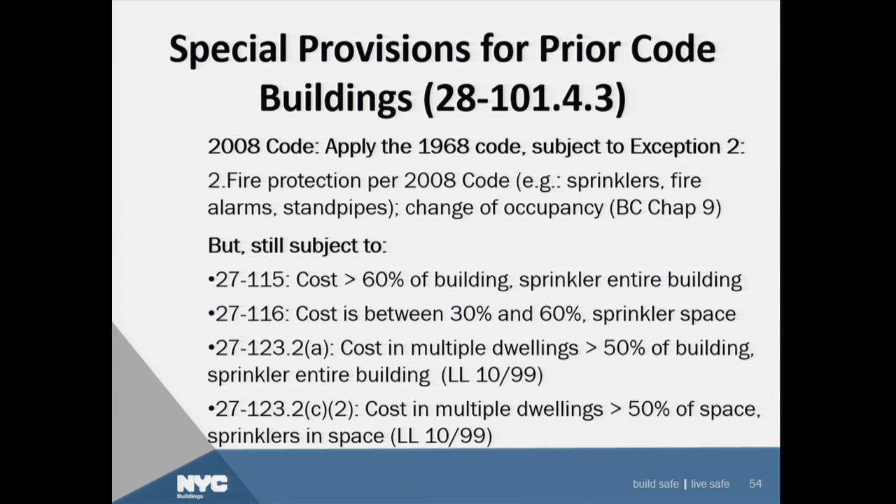So we've brought that all up into the last section of 9, which is 901, and the last subsection of 901 is where you're going to find these provisions. And we have repealed the 27-123.2, etc., and placed it where it belongs in BC 9. Similar with accessibility.

If you read the 2008 code now, it will tell you that you must follow the 2008 code for your accessibility if you change the main use or dominant occupancy of the building, or if the cost of your alteration exceeds 50%. Okay, it says that. And if I hit those two triggers, go to town. I will look at chapter 11 of the building code. I will figure it out. I will make the whole building comply. But what happens if I don't hit those two triggers? Hurrah, I get to use the 68 code.

But when I look at the 68 code, now I have to go back to Local Law 58, and I have to look at what I touch, I have to comply, but I'm not using the 2014 code standards, I'm using the 1986 ANSI standard, which is in itself not perhaps the easiest solution. And if I change the occupancy of the space but not the whole building, I still have to comply anyway. But I use the 1986 book, not the 2003 ANSI standard. So it's a little circuitous. We will always get you to the right answer when we help you. But for the practitioner sitting in their office, it's not so simple.

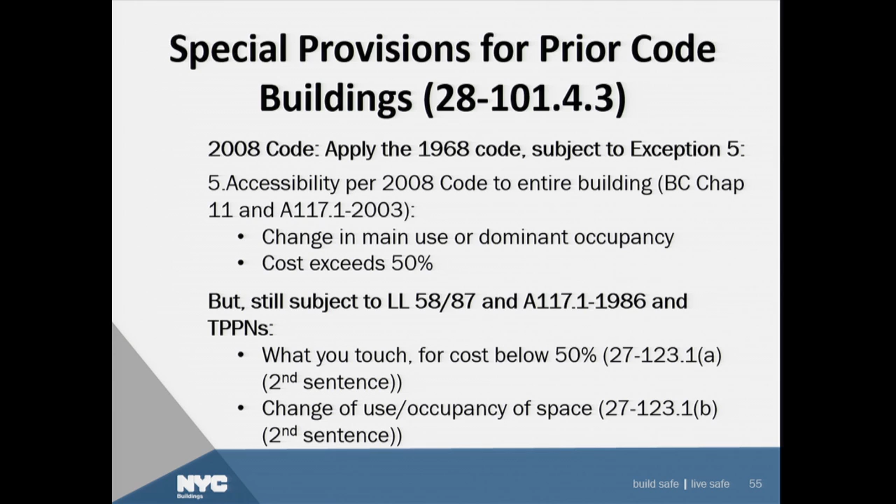So what we've done is we've repealed the 27-123.1s, we've moved everything up, you're using the modern standards, and the last subsection of 1101 in chapter 11 will tell you how to do that. And the way you get there is from the new exception number 5, which sends you to the special provisions for prior code buildings in chapter 5. And we think that this addresses those two sources of confusion: when only part of the system is being altered, and when we have these two parallel universes for fire protection and sprinklers mostly, and accessibility.

And what we've done, it says here, we've consolidated the fire protection and accessibility provisions into BC 9 and BC 11 so that Title 27 is no longer needed for those provisions. We've also incorporated buildings bulletins where possible into the new code so it's in one place, and we've made some other minor changes to simplify.

Let me keep going to the appointed time. I think I can keep going, right? 5 minutes, okay. And then we'll take a break.

So these special provisions, as I said, are exceptions 1, 2, 3, 5, and 16.

Is it okay if I take the break now and come back? Because this is the right break point. I need to know before I let people go, exactly how much time is the break? 20 minutes. That means it's 5 minutes to 10, right? So we are going to come back at a quarter after, right? A quarter after. Okay, thank you.